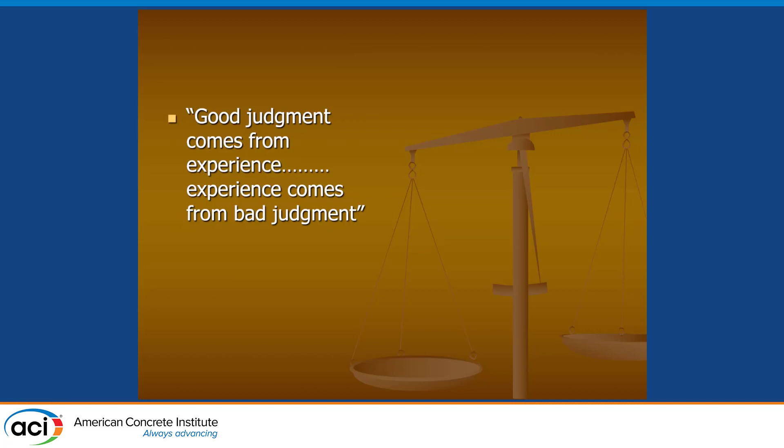I like to say there's 3 kinds of learning: reading, observing, and licking the metal pole. My grandfather said something different about an electric fence, but I can't say that. And good judgment comes from experience. Experience comes from bad judgment, another favorite saying. So some of you might feel like this with cracking, but we're going to talk through this and figure out what tools you have to work with when you get into trouble. We're not going to do this, because that's not going to make cracking go away, and I love to show my clients this one, because this is where I get paid and you don't.

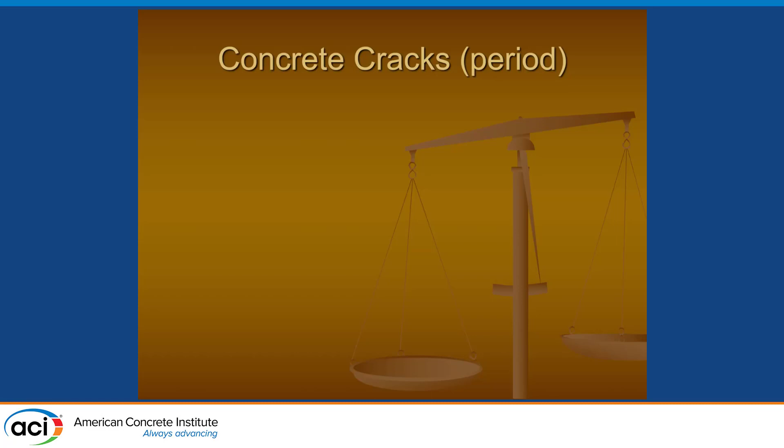So I started my search, and I searched for articles and documents. I searched for crack and cracking all through all the ACI documents and found hundreds of references. And some interesting quotes. This one: what concrete 10 or more years old is free of cracks or micro cracks? I have not seen any in 65 years of concrete work in any kind of structure. Cracking seems to be a universal characteristic of concrete. Books and hundreds of papers have been written on the subject of cracking in concrete.

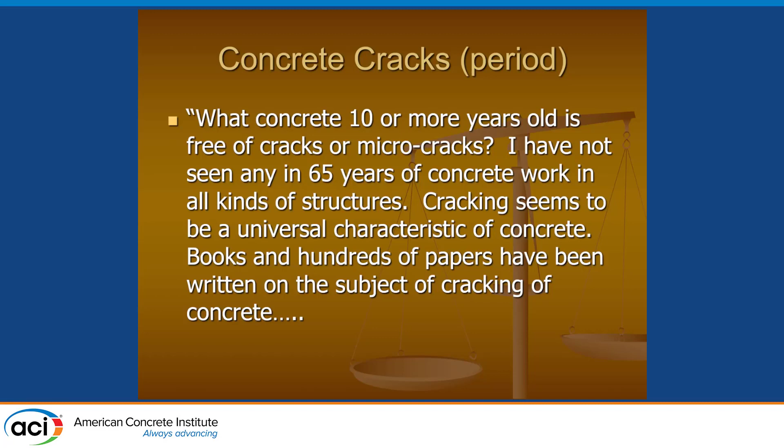And then he goes on to say, large sums of money have been spent in an effort to find a cure, but concrete seems to go its own way, crack anyway. I'm not sure that researchers will not stop looking for a cure. I wish them all the luck. They need it, and the industry needs it also. Does anyone want to guess whose quote that was? It was Ed Abdun-Nur, who was around a long time ago.

Remember Calvin, Ed? By the way, Calvin wins the award, the popularity contest. You had the most people in the room this morning at the start of this session, so you win.

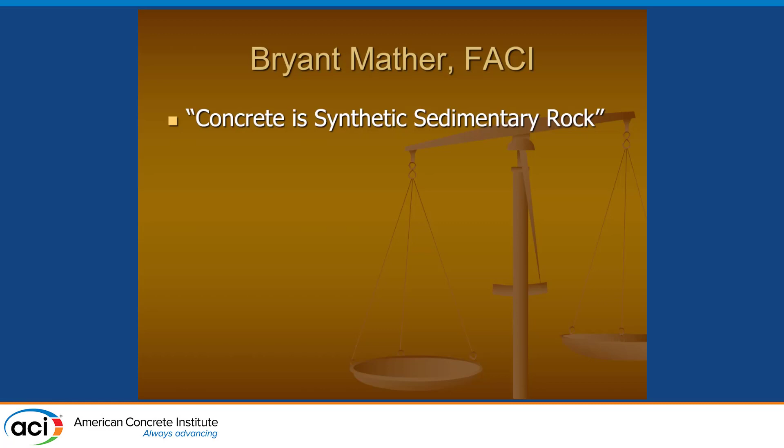And then my other favorite is Bryant Mather. Concrete is synthetic sedimentary rock. When God figures out how to make rock that won't crack, we'll figure out how to make concrete that won't crack, right? And then I did come across an article that said we can produce crack-free concrete. Why the hell would any of you write that article?

Just put a gun to your head. Come on.

So then you start looking around and you notice things like, okay, we cut these control joints in. These are cracks you pay for. Owners, I tell them it cracked, and I said, you got a free control joint. They never think that's funny, but they get it. So then you start wandering around.

This was a job where I was actually on the owners committee. It was a Boy Scout building that we converted. It was an old drill hall at Fort Snelling. We converted it to a Boy Scout urban adventure center. And around the center were the slabs,

and there was an old slab next to a new slab. And they said, do you want us to run the control joints through the old slab? And I said, well, isn't the old slab cracked about every 10 or 12 feet? They said, yes, it is. Well, here's an example. There's the crack that you paid for, and there's the crack you got for free.

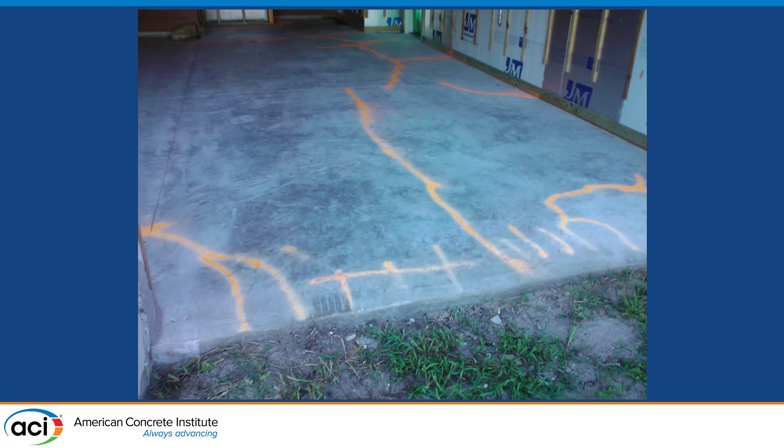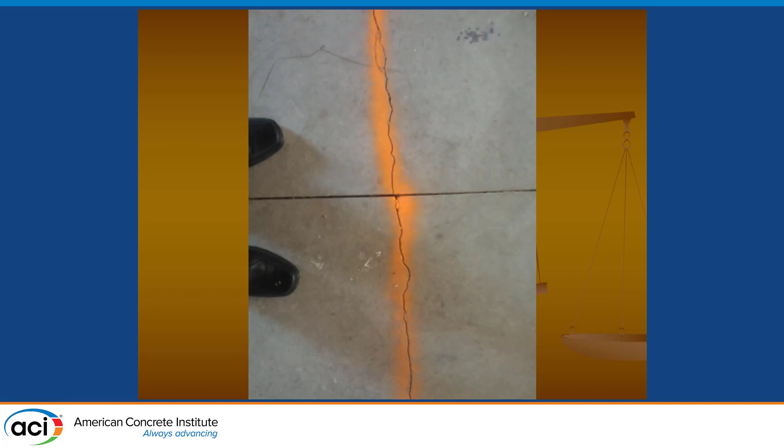And then you start noticing, you go to your kid's football game, and you see the cracks running around and everything. And this is actually a project in Florida I was retained on. This owner wanted to tear down this house because of the cracks in the slab in Florida. And of course, mapped them all out. Some of them were kind of bad. Actually, that's still the Florida job.

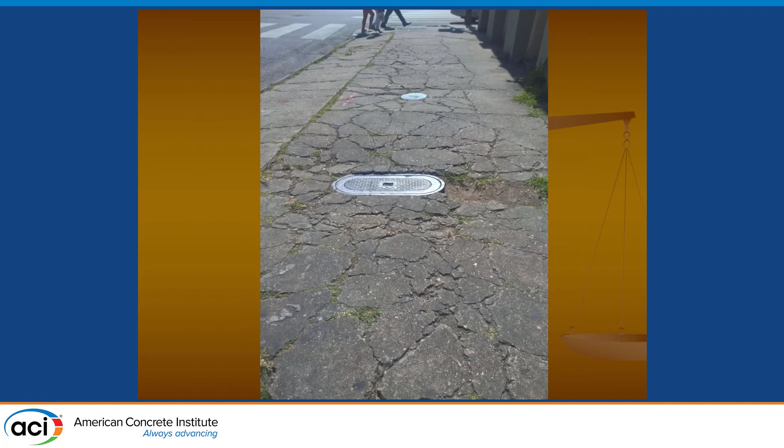All right, so what industry guidance do we have? I am going to talk about legal cases in a minute, but I searched through and said, okay, what guidance do we have in ACI documents to work with cracking? Well, there's a really good one in 360, Guide to Design of Slabs on Ground. Even with the best slabs and proper construction, it's unrealistic to expect crack-free and curl-free floors. Every owner should be advised by the designer and contractor that it is normal to expect some cracking and curling on every project. Stop.

What does that say? Every owner should be advised by the designer and contractor that it is normal to expect some cracking and curling on every project. How many of you do that? Does anybody know that it said that? It's amazing. You search long enough in ACI documents, you can find anything you want. But part of what I'm going to leave you with is owner expectations and disclaimers, whatever you want to call them. I think you should be telling your clients that you're going to get some cracks.

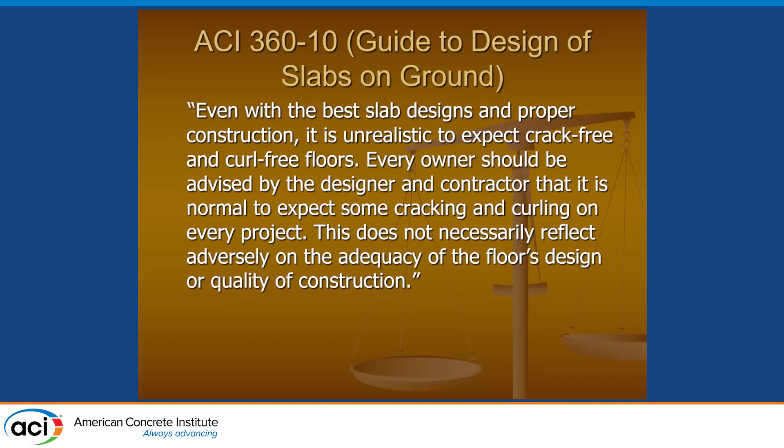Now, it says this does not necessarily reflect adversely on the adequacy of the floor's design or quality of construction. And then we go to 224.1R-07, Causes, Evaluation, and Repair of Cracks. Cracks in concrete have many causes. They may affect appearance only, or they may indicate significant structural distress or lack of durability. Cracks may represent the total extent of the damage, or they may point to problems of a greater magnitude. Their significance depends on the type of crack and the type of structure.

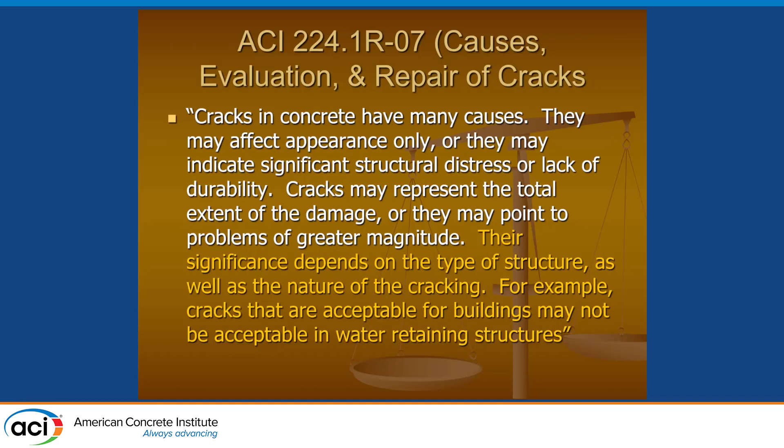For example, cracks that are acceptable in buildings may not be acceptable in water-retaining structures. I had a big lawsuit on an aquarium tank. Cracks in an aquarium tank are a problem. People don't like to get sprayed when they're looking at the aquarium. Here's the closest I came to what I'm calling the Holy Grail. Cracks need to be repaired if they reduce the strength, stiffness, or durability of the structure to an unacceptable level, or if the function of the structure is seriously impaired. That's the closest I've found to this line between normal and defect.

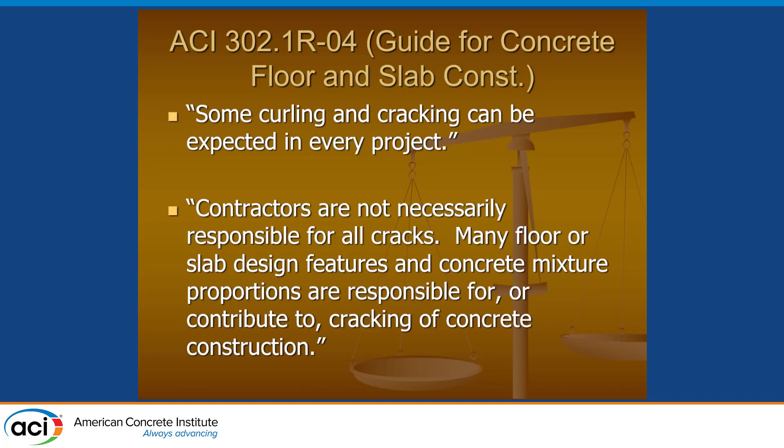Here's 302.1R, Guide for Concrete Floor and Slab Construction. Some curling and cracking can be expected on every project. Contractors are not necessarily responsible for all cracks. Many floor slab design features and concrete mix proportions are responsible for or contribute to cracking of concrete construction. So there's a lot out there. Here's an interesting one. Cracks are objectionable where their size and spacing compromise the strength, stability, serviceability, function, or appearance of the structure.

Can anybody tell? There's a question back there? Just real quick, that slide you said was the Holy Grail, where was that from? There was no reference.

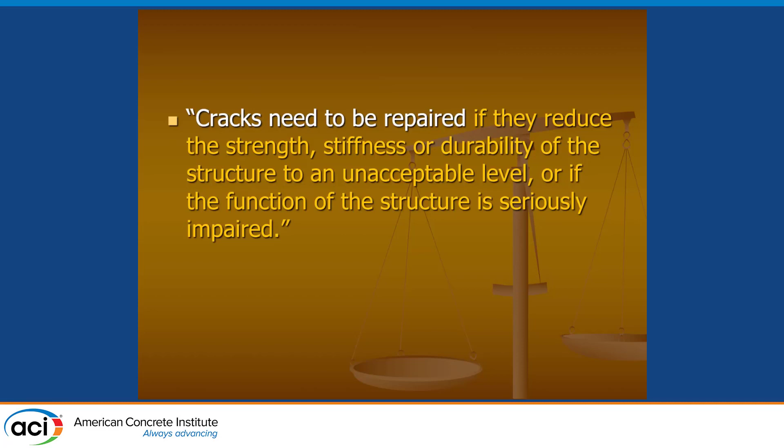It's 224.1R07. Yeah. Now, this is what's interesting. The only reference I found to appearance, and can you tell me what document this is? Somebody shout it out. Mass concrete. Why are we worried about appearance with mass concrete? And why is this the only place that appearance shows up? I don't know, but there it is. The rest of it, we don't call out appearance. The ACI documents don't talk about appearance.

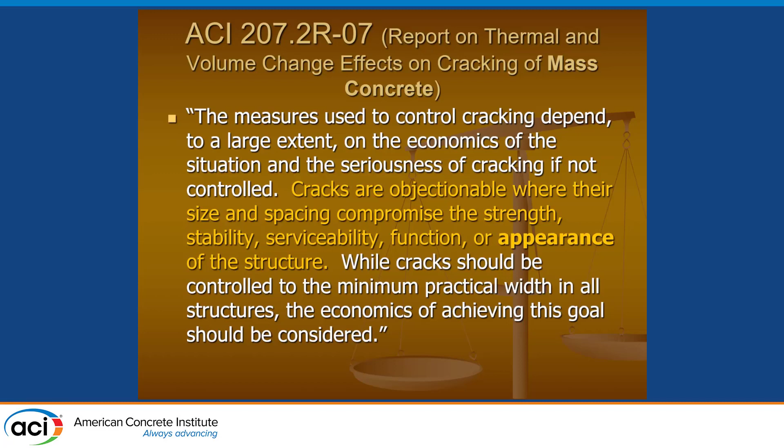Okay, so cracking is expected and in fact required to engage steel reinforcing. You've heard a number of times today that it's good in compression, bad in tension, but then it cracks, engages the steel, but it has to crack to engage the steel. Of course, beams, columns, slabs, and walls is where you're going to get that.

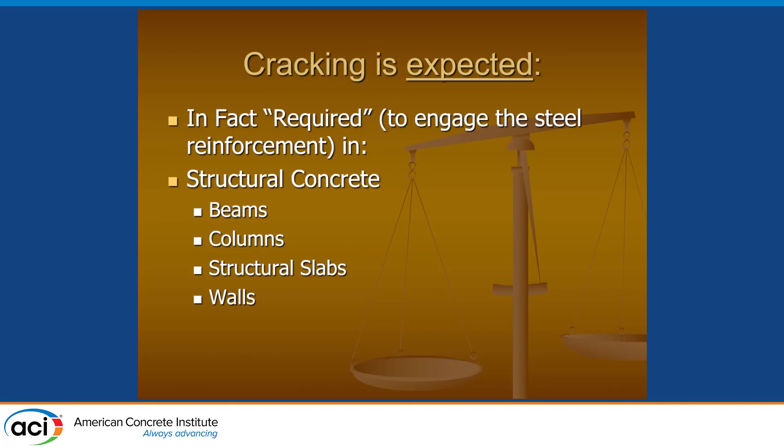Now, there's a table in 224R01 that talks about guide to reasonable crack widths. In other words, this gets cited by a lot of engineers about the crack width that you should expect. And of course, you got these little crack gauges. CTL has the crack gauges over in the conference center if you want to go get one. But they talk about what's an acceptable crack width.

But then I say, read the footnote. It says it should be expected that a portion of the cracks in the structure will exceed these values. With time, a significant portion can exceed these values. These are general guidelines for design to be used in conjunction with sound engineering judgment. Imagine that. Let's apply a little sound engineering judgment.

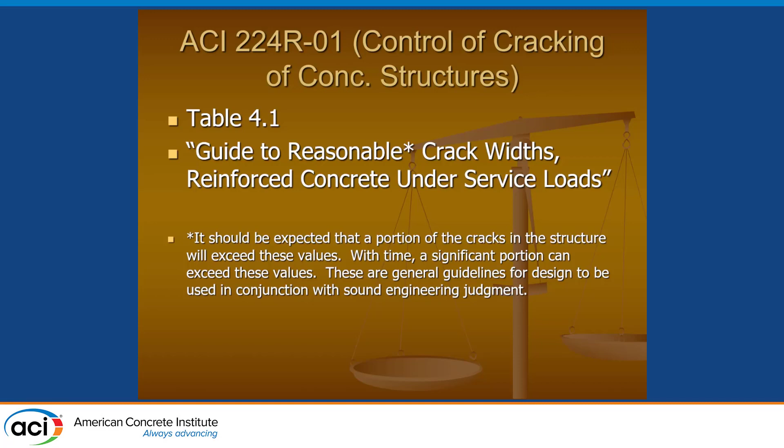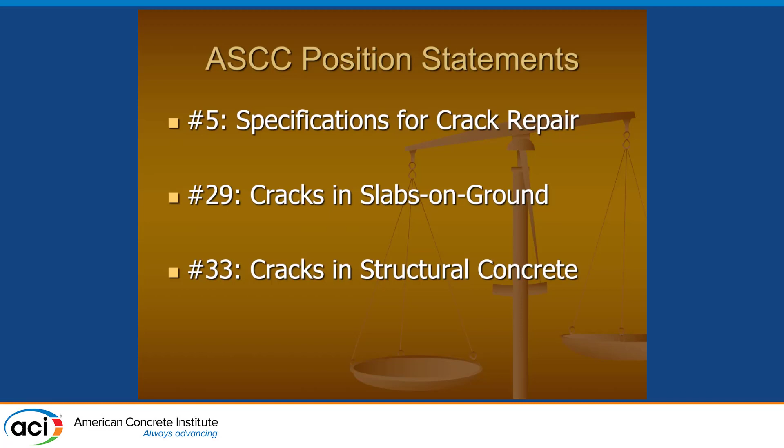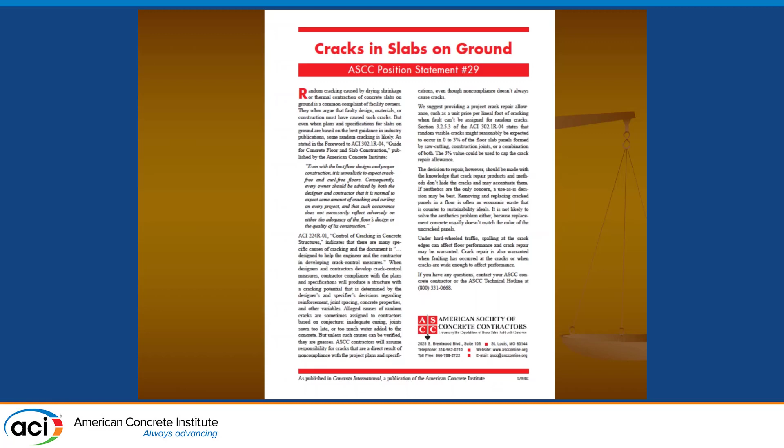All right, other industry guidance. How many of you are aware of the ASCC position statements? Very valuable resources. Really valuable. Specifications for crack repair, cracks in slabs on ground, and cracks in structural concrete. I'm just going to flash them up here quickly. I won't read them and go through them, but these are really good resources. There are some other comments in here about discussing crack expectations with your client. Again, another reference like I talked about before. Comment made in cracks in slabs on ground.

I love this one. The decision to repair, however, should be made with the knowledge that crack repair products and methods don't hide the cracks and may accentuate them. That's what Calvin was talking about at the start of this session. You repair the crack, you're just going to make it more obvious. If aesthetics are the only concern, a use-as-is decision may be best.

I've had a case like this right now on a public facility where they're all hyperactive about some hairline cracks, and we're suggesting spray it with a sealer. Seal it up with a sealer, and you'll be fine. You're saying no. Why no? It accentuates it also. All right. Well, I'll tell my expert that when I get a hold of him, when I get back.

Anyway, removing and replacing cracked panels in a floor is often an economic waste that's counter to sustainability, not likely to solve the problem, and it probably won't match the color. So sometimes the repair can look worse than the crack.

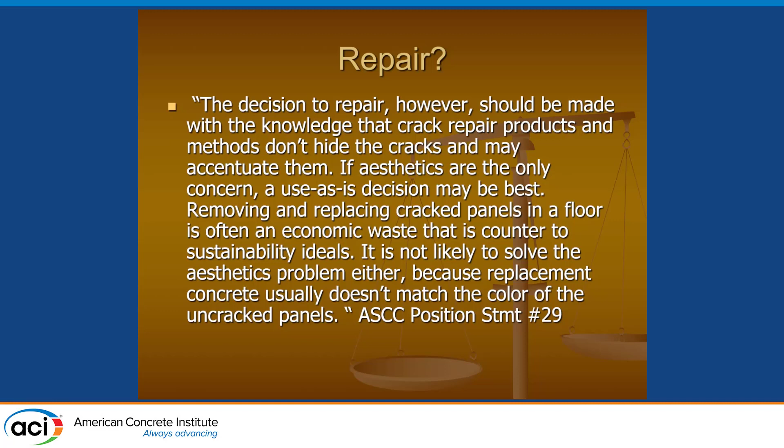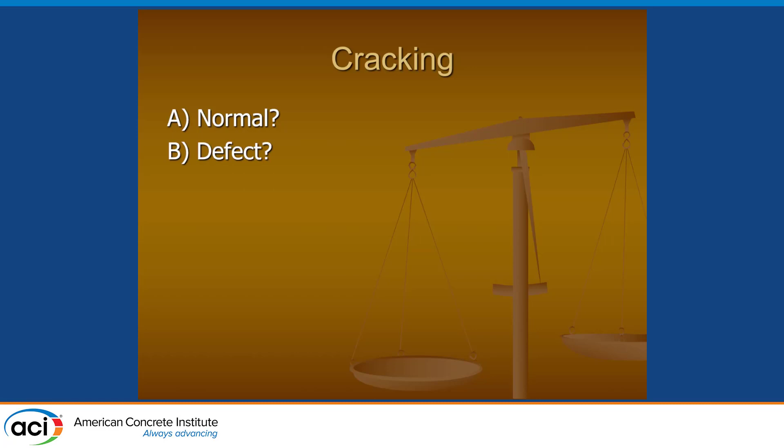Okay, so here's an interesting thing. Here's our multiple choice exam. Is the crack normal? Is the crack a defect? Do we have unrealistic client expectations? Or do we really have a psychological problem? And I'm going to call that psychological problem hyperfocus, because this is what you get when you get cracking. I'll bet I get a call a month from somebody who says my driveway's cracked or my sidewalk's cracked, and I don't represent any homeowners. I send them somewhere else.

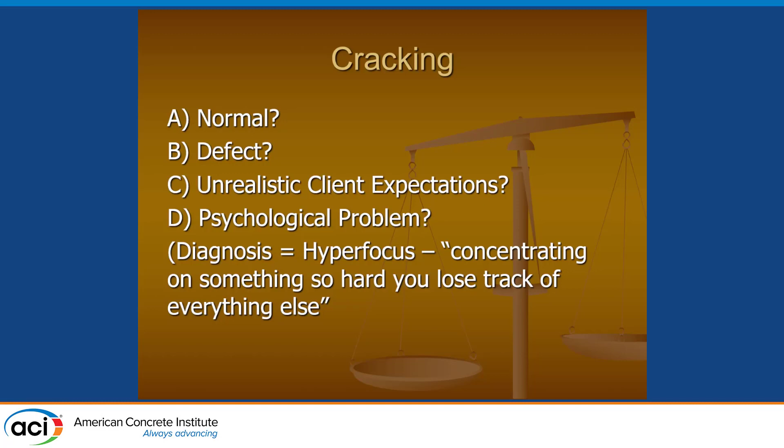Concentrating on something so hard you lose track of everything else. That's what happens when owners get cracks and they start focusing on them. It's a psychological problem. How can we address that? By actually advising them up front that it does crack, and then putting in some disclaimers in the contract documents, and I'll talk about those in a minute. So managing owner expectations, that's what we're really talking about.

Otherwise known as unrealistic client expectations. Now, we're not talking about the truly bad conditions that could weaken the structure or really affect long-term durability. We're talking about the normal run-of-the-mill cracks that are going to happen, and you just need to be aware of.

So these are actual disclaimers that I found going through documents, looking at what can we put in, what do other people use. Here's one that says some minor amount of cracking is to be expected. In fact, it's required to crack in order to engage reinforcing steel. We're not responsible for minor cracking that does not affect the strength or serviceability of the structure of which the concrete is a part. Good disclaimer, good example.

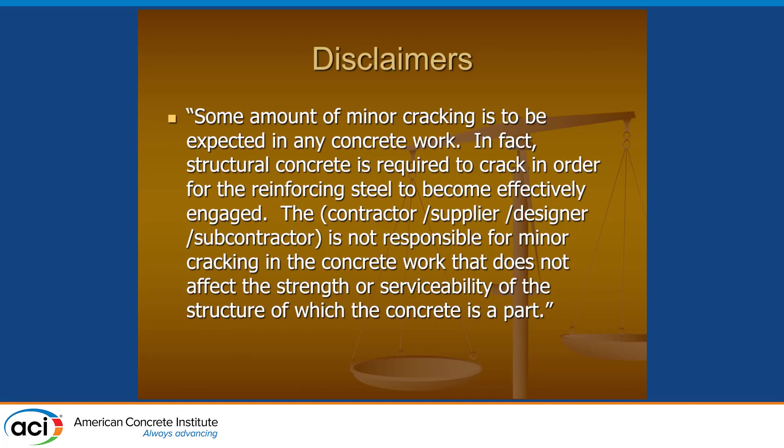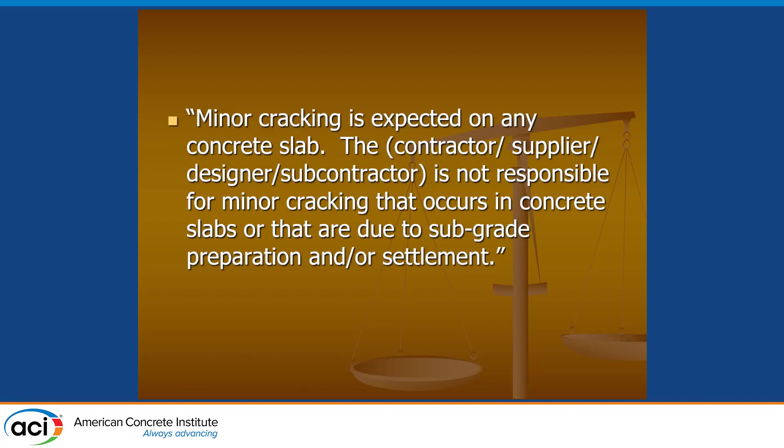Here's another one. Minor cracking is expected on any concrete slab. Whoever it is, not responsible for minor cracking that occurs in concrete slabs or that are due to subgrade preparation or settlement. Here's another example. We won't be responsible, and this is an interesting one because here they're saying we won't be responsible for cracks that don't result in crack widths of a certain size. So this contractor is willing to say, I will basically guarantee to you we won't get cracks that will exceed a certain size.

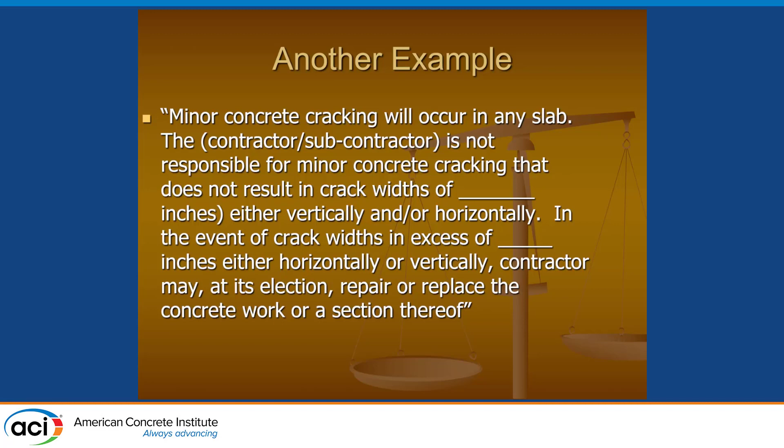Okay, here's a concrete supplier. The warranties stated above are sole and exclusive. If you're selling a product, this is more to the concrete suppliers. You want to make sure that you exclude certain warranties that are implied by law, which are typically merchantability and fitness for the intended purpose. So that's what this particular

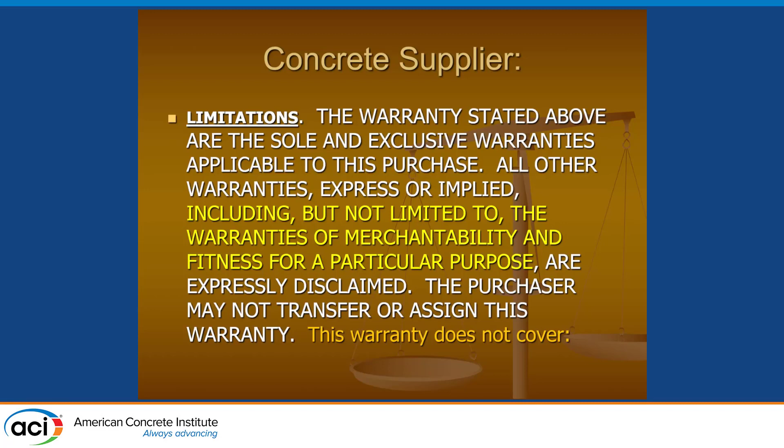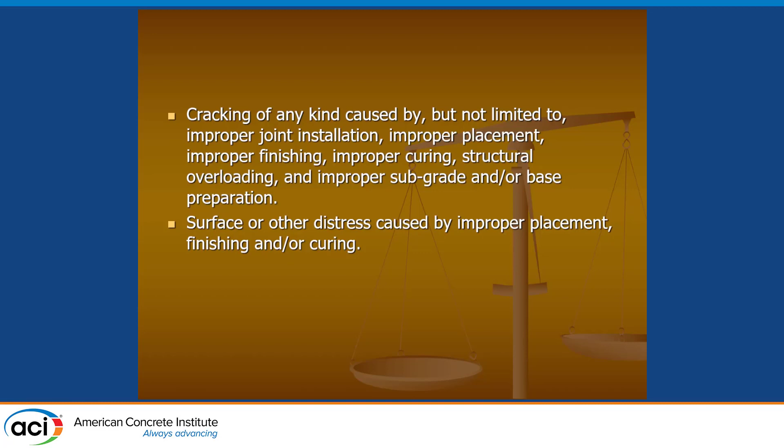Surface or other distress caused by improper placement, finishing, or curing, and any defects caused by the addition of water exceeding the water-cement ratio specified above, and or water added to the surface of the concrete during placing or finishing. This is obviously a client who had been terrorized by cracks, right? Because these are all the possible problems you can have if you're not the concrete supplier.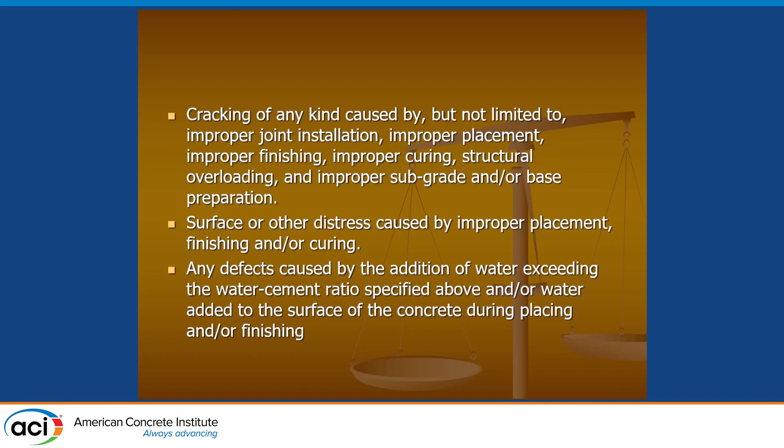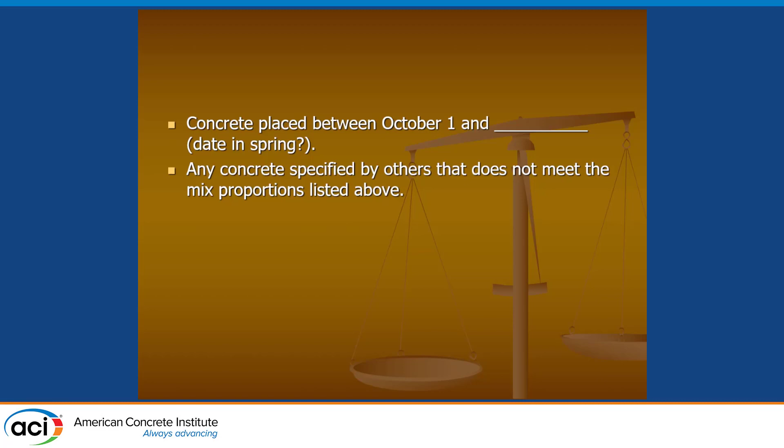Here's another one, another client that uses this one. They won't guarantee crack-free concrete between October 1 and some date in the spring, which for us in Minnesota is later than for most everybody else. And any concrete specified by others that does not meet the mix proportions listed above. Damage caused by others, including but not limited to snow plows and other equipment. And you can tell this is someone in Minnesota.

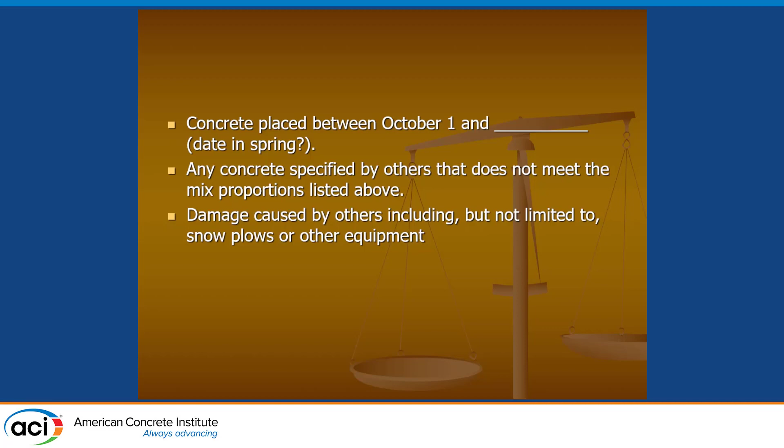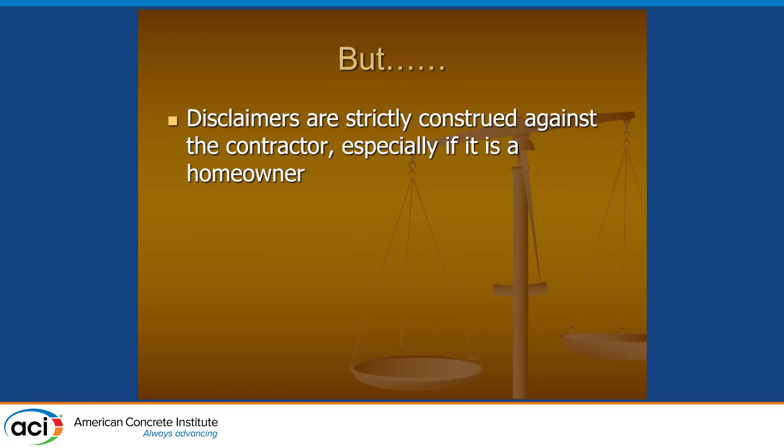Now, often these disclaimers are strictly construed against the contractor, especially if it's a homeowner. But, you know, let me back up a minute. So let's talk about an example out in Colorado. This particular case, and I did sweep through to try to find legal cases involved with concrete cracks and cracking. There aren't that many, but there are some out there, believe it or not. This particular one was in Colorado, and it involved expansive clay.

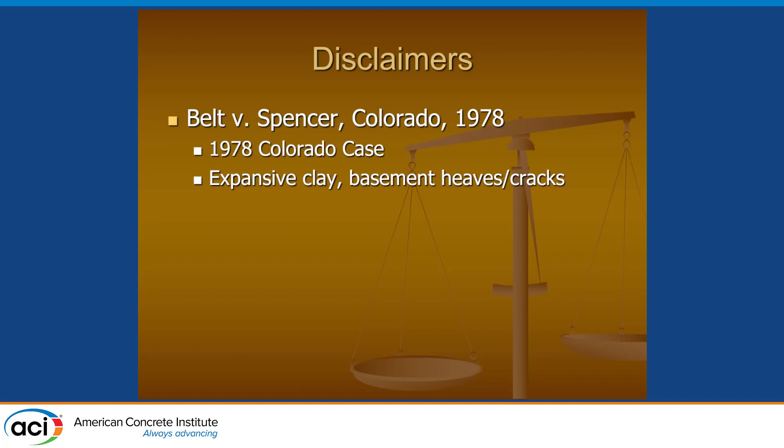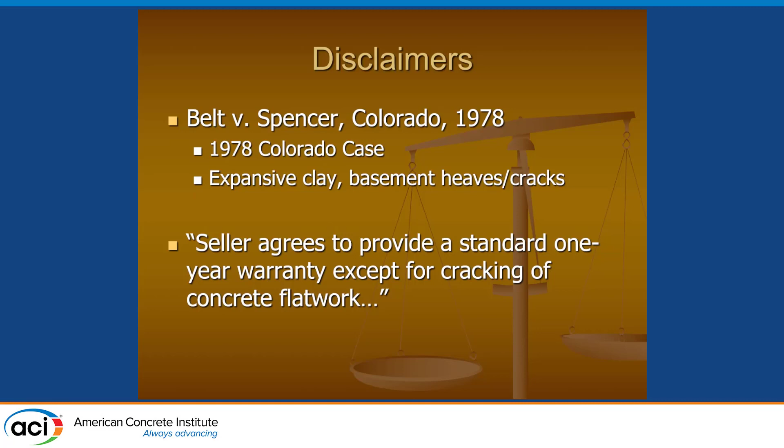The basement heaved and cracked. The seller agreed to provide a standard 1-year warranty except for cracking of concrete flatwork. Now, the problem here is that the warranties may be limited by express provision in the contract. However, the limitation must be accomplished by clear and unambiguous language, and the limitations will be construed strictly against the builder vendor of the house. That's typically what a court is going to do anytime a homeowner or a small owner is involved.

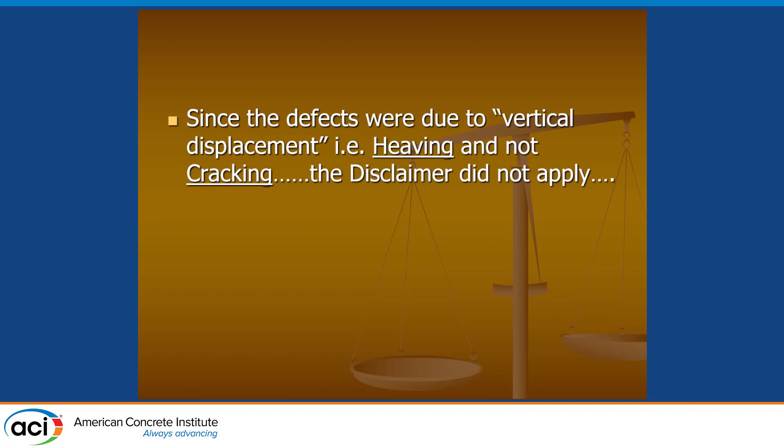And this court said, and get this, this was a real stretch to find in favor of the homeowner. Since the defects were due to vertical displacement and heaving, not cracking, the disclaimer did not apply. Now, that's a real stretch. That's a court trying to find in favor of a homeowner. How about some other case law? This was actually South Africa.

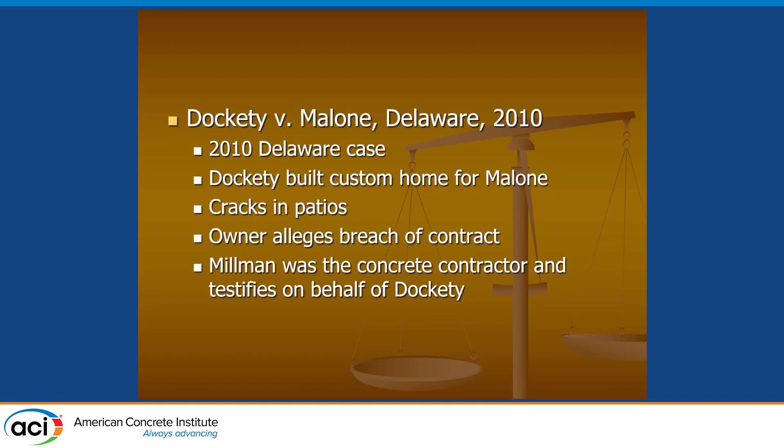So that's the gap there. So here's a Delaware case, 2010, custom home built for a guy named Malone. And of course there's cracks in the patios when the project's done. Owner alleges breach of contract. A guy named Millman was the concrete contractor and testified on behalf of this Dockety Custom Homes or whatever it was. And testified in court that this type of cracking is not a defect in the work, but rather the cracking is simply movement that is constant in the nature of concrete.

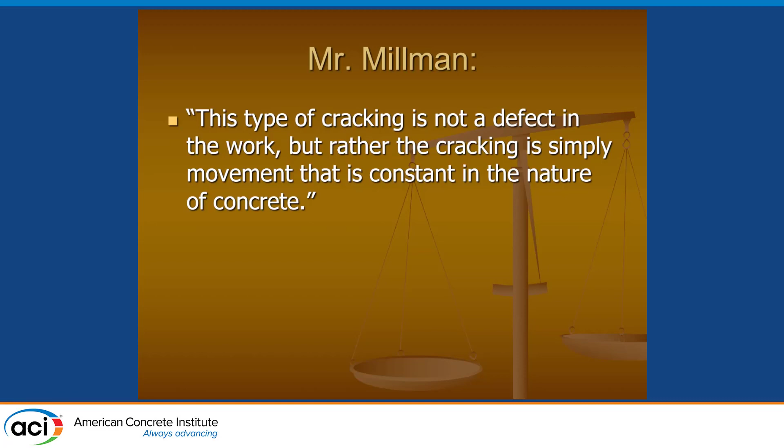And lo and behold, the court says that that's credible testimony. Cracking that is attributable to the expansion and contraction of concrete is an anticipated outcome of using concrete and does not constitute a defect in workmanship.

I would expect all of you now to stand and applaud. I found it. I found a case, right?

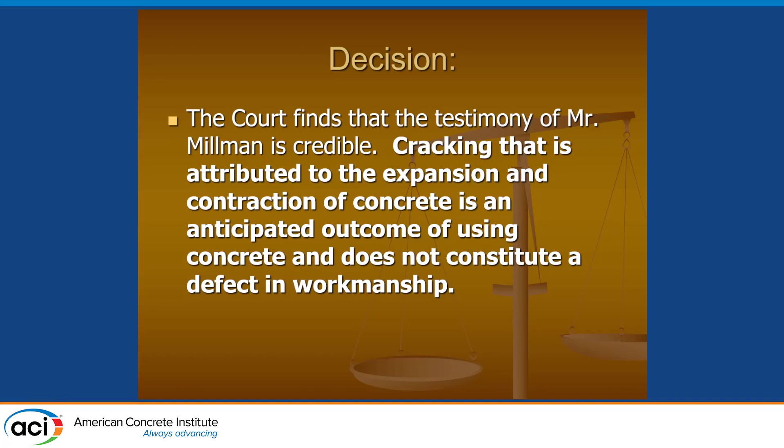All right, but, of course, there's other cases that don't come out quite so well. Here's a case involving a post office, 1993, out in Canoga Park, California. Big slab, reinforcing bars, numerous problems, 10-day trial, 119-page opinion, which is not unusual for the business I work in, to have trials. My record is an 8-week jury trial and 213 days in arbitration on a case. So these cases can take on a life of their own. So this one, actually 10 days and 119 pages is not too bad.

But can you imagine sitting on a jury for 2 weeks solid, listening to a construction case? You know, you could almost go mad.

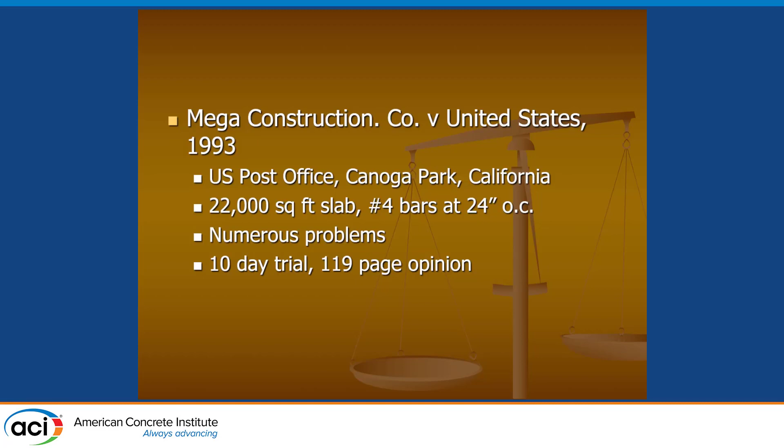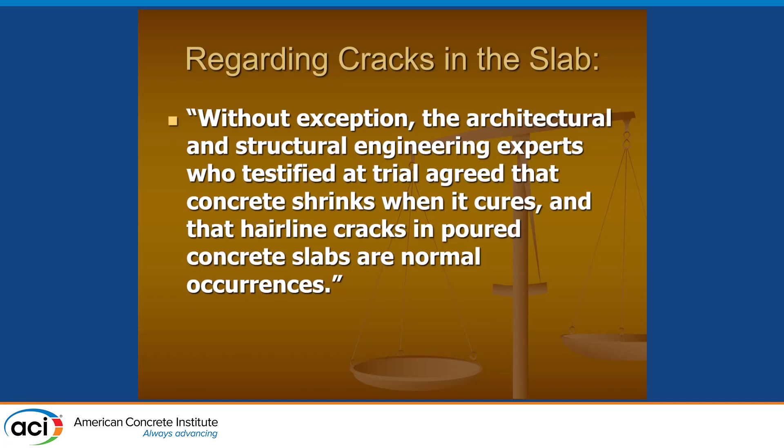All right, so this court looked at this and said, well, the experts who've testified here, what did they say? They agree that concrete shrinks when it cures and that hairline cracks in concrete slabs are normal occurrences. So far, so good. However, they said there's credible evidence here that the cracks in this slab were far more than usual hairline cracks. It was uncontroverted that 4 of the cracks ran the entire length of the slab, and I think I said it was 22,000 square feet.

Cracks were so wide that sand under the slab was visible. A coin could fall to the bottom through the crack. 70 to 80% of the rebar lay exposed on the sand beneath the slab. Yeah, where does rebar end up in a slab if it's not on chairs?

I had a case once where we thought we were going to win because they didn't put the rebar on the chairs, and I was representing the engineer who was out looking at the slab and taking really good photos of everything, except that the photos included the workmen standing on the rebar raking the concrete without chairs, and so we had photos of it in our own file, which didn't work out so well because our guy was standing right there, obviously, and didn't catch it. But anyway, so rebar's on the bottom of the slab, not installed according to the contract.

Some people tell me that standard of care applies only to architects and engineers. I've had that debate with people. That's not true. Standard of care applies to any case involving negligence. If you drive your car from here, there's a standard of care that applies that includes, of course it's the law, but includes driving safely, driving carefully, observing the speed limit, stopping at the stop signs. So there is a standard of care that applies to contractors.

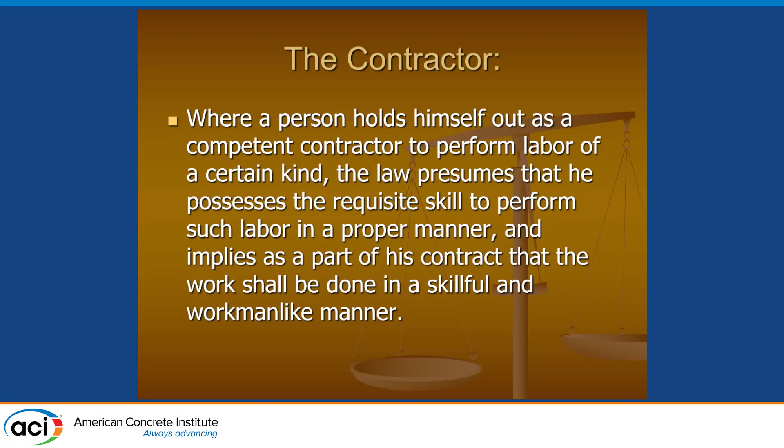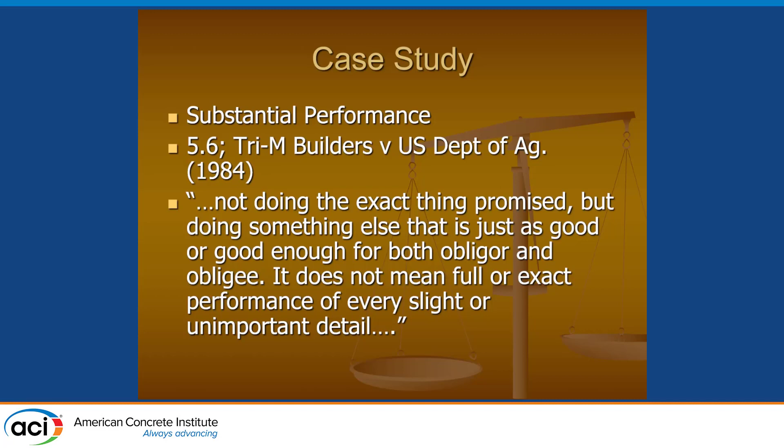And it came out of this case on Dockety v. Malone. If you hold yourself out as a competent contractor to perform labor, the law presumes you possess the skill to perform it, and that the work should be done in a skillful and workmanlike manner. That's basically the standard of care for a contractor, regardless of what the contract says. A couple cases on substantial performance. That's doing something. It's not doing exactly what the contract says, but it's doing something good enough for the purpose intended. And that's basically what was the finding in this particular case.

So in this Dockety v. Malone case, they also went on to talk about the work being done not in exact requirements of the contract, but if a reasonable person were satisfied by it, the builder's entitled to recover despite the owner's dissatisfaction. That was another point made in that case, which I thought was interesting. That really isn't the standard, but that's the standard that this particular case applied.

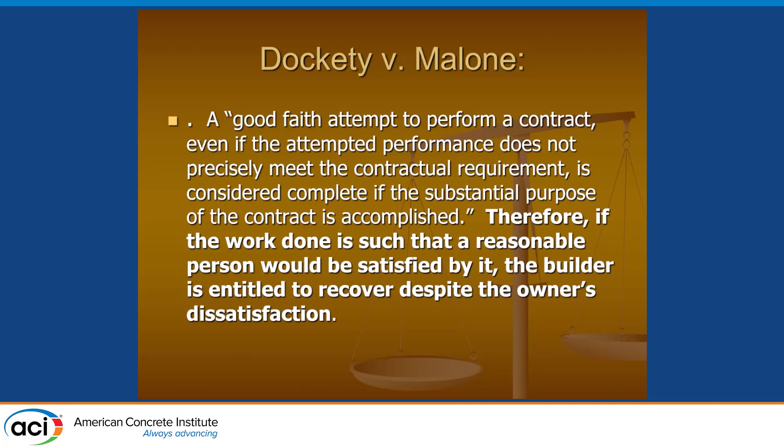Now, government contracts can require strict compliance with contract documents, but you've still got the options of substantial performance as a defense and economic waste, meaning tearing out and repairing something for minor cracks could be economic waste as opposed to the cost to repair.

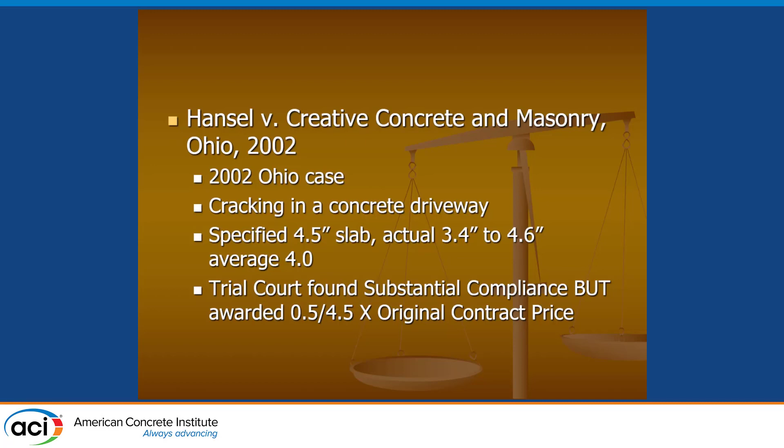Here's a cracking case in a concrete driveway. Supposed to be 4.5-inch slab. The slab thickness varied pretty badly, average of 4 inches. The court found substantial compliance, but awarded the owner the ratio of the concrete they didn't get, basically, which I thought was kind of creative.

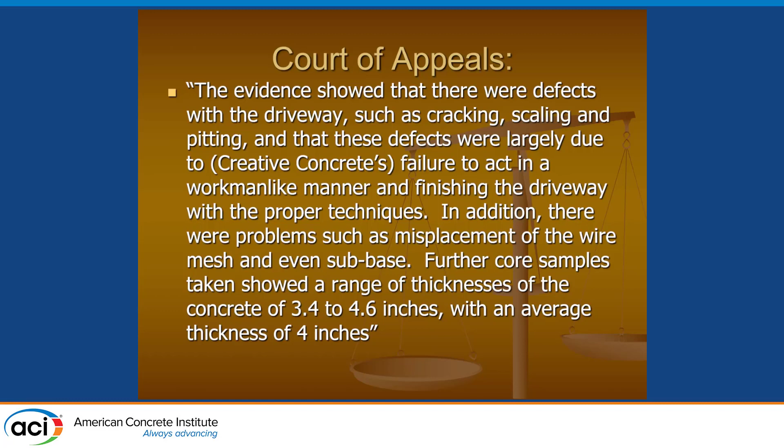And here's where they talked about the range of the defects and the average. Here was the finding I thought was interesting. Despite these problems, the evidence supports the magistrate's conclusion that they had substantially performed under the contract and the driveway had not failed in its essential purpose. In other words, you could still drive and park on it. Right? Still worked as a driveway.

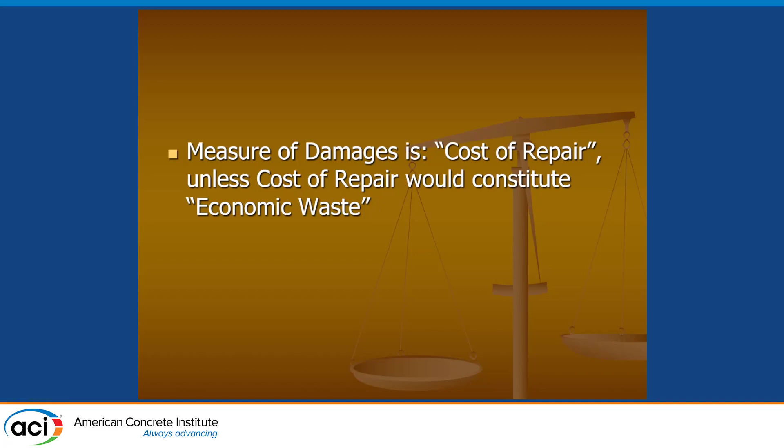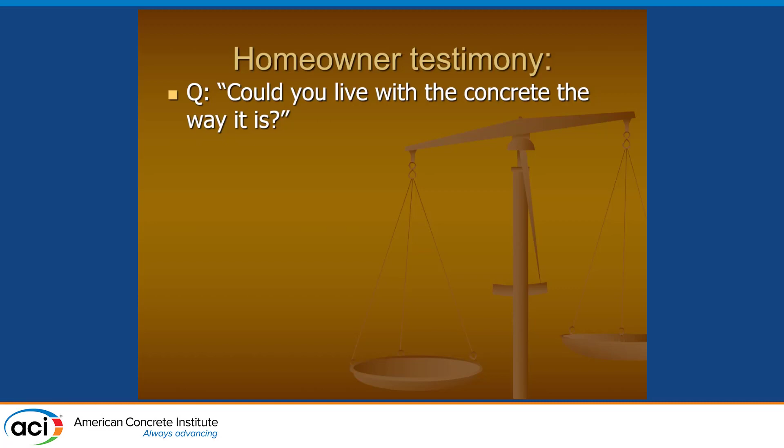Generally, in a construction case, damages is the cost of repair, unless cost of repair would constitute economic waste. So I won't get too much further into that. But here's a classic, in this particular case, classic homeowner testimony about cracks in concrete. Asked on cross-examination, could you live with the concrete the way it is? And the owner says, if it was do or die, I guess I could.

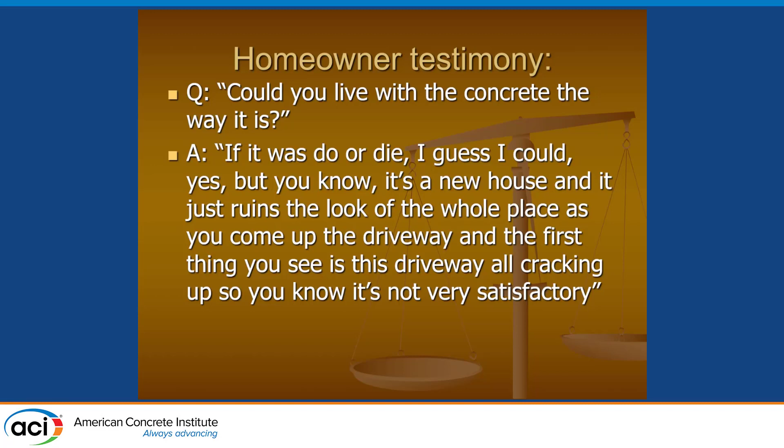But you know, it's a new house, and it just ruins the look of the whole place as you drive up the driveway, and the first thing you see is the driveway all cracking up. So you know it's not very satisfactory. And that's the psychological problem. That's what I talk about in psychology. I won't get too much further into this.

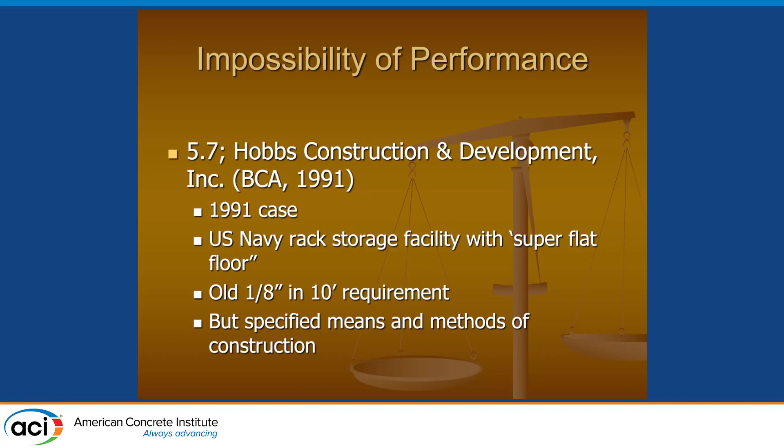One of my favorite cases, this goes back to the old 1/8 inch in 10-foot flatness requirement before the F-numbers, and we realized we didn't really know how to measure that, and we realized we're specifying it and nobody was building to it. So it was a Navy rack storage facility, 1/8 inch in 10 feet specified, and they also specified the means and methods of placement, and basically the court said, look, without deviating from the spec, you can't reach 1/8 inch in 10 feet and build it the way that was specified. So it's impossible to perform.

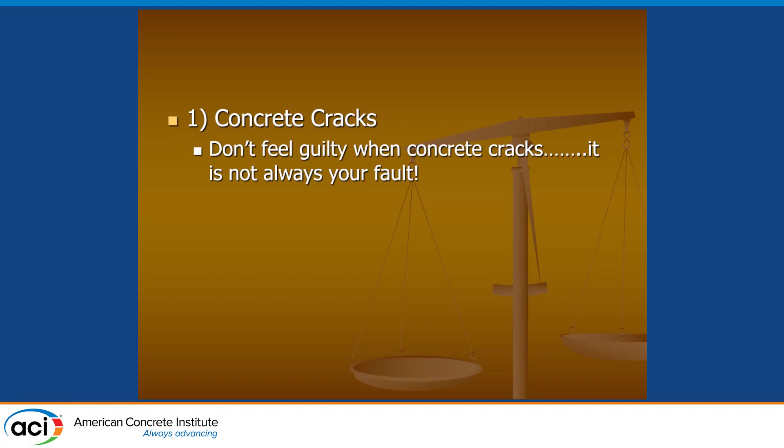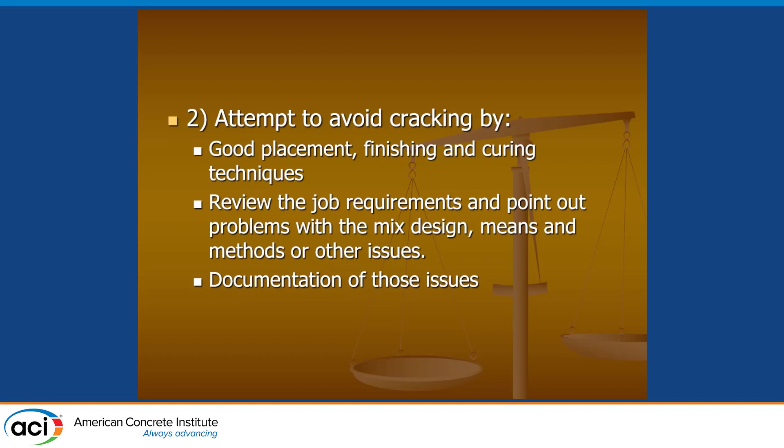The point is, we've had construction defects, cracking in concrete for ages. It's amazing that this stuff is still there. So concrete cracks. Don't feel guilty when it cracks. It's not always your fault. Rule number 1. Number 2, try to avoid cracking by good placement, finish, and curing techniques. Review the job requirements, documentation of those issues. Educate your clients. Like I said, how many of you actually talk to your clients and say, there'll be some cracking here, here's the parameters. Use the ASCC position statements if you can.

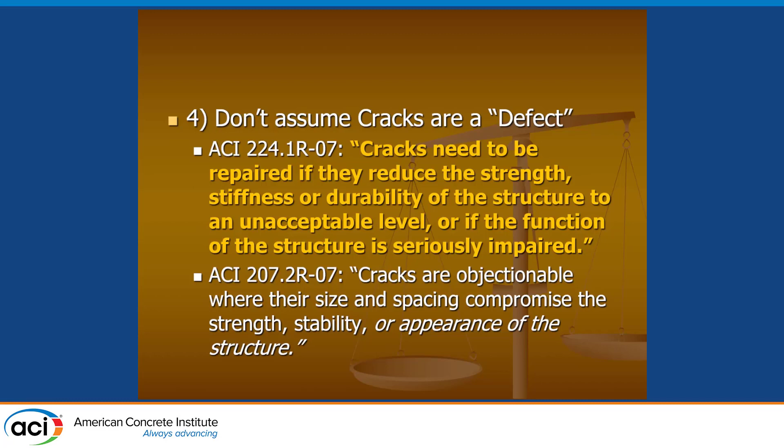Don't assume cracks are a defect. Remember 224.1R: cracks need to be repaired if they reduce the strength, stiffness, or durability of the structure to an unacceptable level. That, to me, is the defining point between normal and defect based on what I could find. Position statement number 5, use a repair allowance in some of these jobs. Remember the legal defenses: substantial performance, measure of damages, impossibility of performance.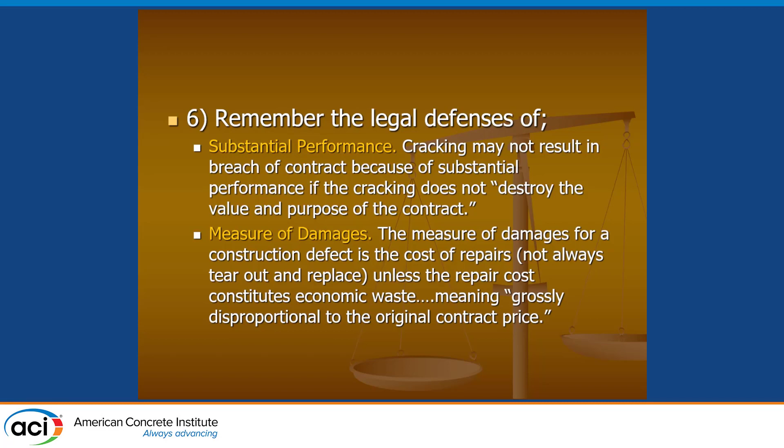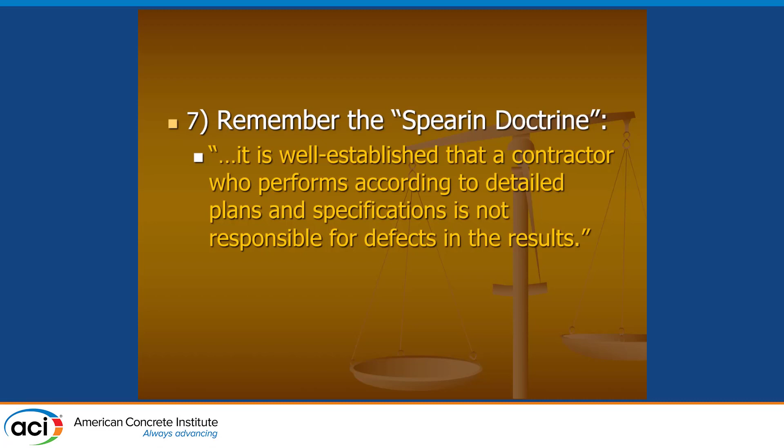And then for contractors, this is something for engineers to be aware of. If a contractor can show that they've strictly complied with the contract documents, let me repeat that, they can show that they have strictly complied with the contract documents and it doesn't work, then the burden shifts the responsibility to the engineer from the contractor. If the contractor cannot show that they've strictly complied with the contract documents, that burden of risk stays with the contractor. The best possible outcome for a contractor is to get paid for the repair work.

But it's all about people. It's all about people working through these issues and resolving them. Okay?